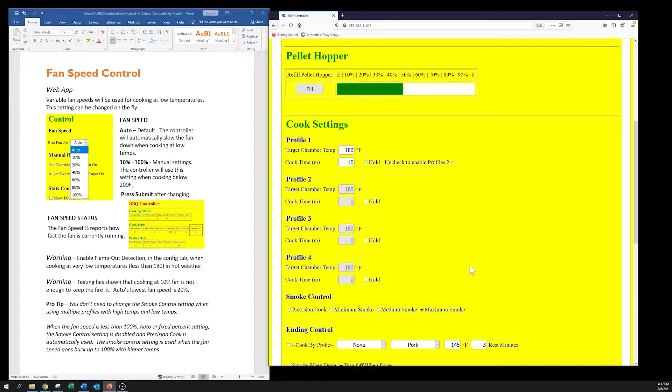I know a lot of people asked to have the fan speed settings next to each profile. I thought about that and looked at this, but this fan speed control requires quite a bit of changing behind the curtain, if you will. When you start slowing this fan speed down, a few things need to happen, and we'll go over the config tab - I'll show you real quick.

When you slow the fan speed down, one thing - your fuel on minimum needs to change. Now you're not going to see it change on the config tab; this is all done behind the curtain. What else changes? It also changes how PATC runs.

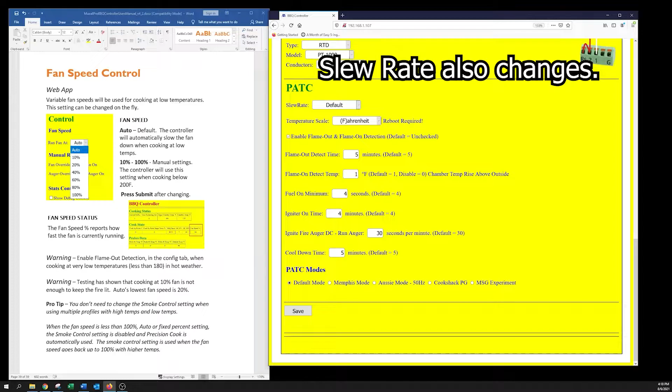Right now it's in the default mode, which most people are in. When you're running with a low fan speed, PATC's actually running more like Aussie mode. To help the user not have to figure out what all the settings need to be to run these different modes, I came up with the auto mode.

In auto mode, basically, if you're running a profile and say profile 1 is at 350, profile 2 is at 180, and profile 3 is at 300 or what have you - when you're running at 350, you're going to want like 100%. The fan will run at 100% because you need as much air as possible to generate the heat. But when we drop down to 180, not so much, right?

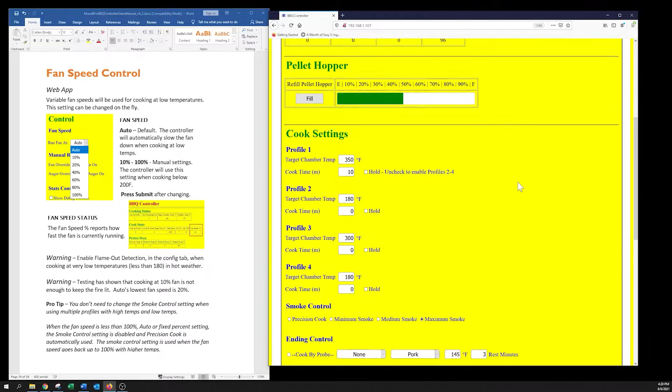So in auto mode - or any mode actually, auto or manual - when the chamber temp gets closer to 180 degrees, it's going to start reducing the fan speed. If you have it set on manual override like it is now, it will just set it at 40% and forget it. If you have it on auto, it will start adjusting down - it'll drop from 80 to 60, as the grill starts cooling off, and depending on how low the cooking temperature is, it will adjust the fan speed accordingly. It won't go below 20% in automatic mode.

The only way to get it below 20% is to use the 10% manual setting. I actually have a warning about using the 10% manual setting in the manual, because my testing showed 10% fan isn't enough to keep the fire lit.

Okay, so let's see where we are. I changed a bunch of stuff - let me refresh this real quick. I just didn't want to change all this; I'm a bit lazy sometimes. Okay, so it's running at fixed 40%.

Let's see, I don't think we should still have our graph. Ah, very good, all right, and we're getting it. It was funny, it was running along pretty good, then all of a sudden we started getting some swinging, and I think it's kind of windy outside.

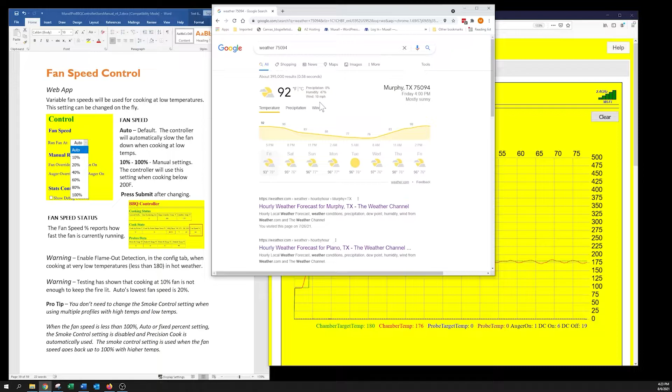It says 10 miles per hour, so it's a bit windy out there. I think that's what's causing these swings right here, is the wind. The barbecue isn't that hot to begin with, and when you start blowing air on it, it really cools it off and causes some of these swings.

One thing I want to let you guys know is behind the curtain, when you set this to 40%, I'm changing some other stuff. This isn't just a straight 40% run fan, because PATC will go crazy if it's on its default settings and you set this fan speed to 40%. So behind the scenes, there's other things going on. That's why it took me so long to get this feature out.

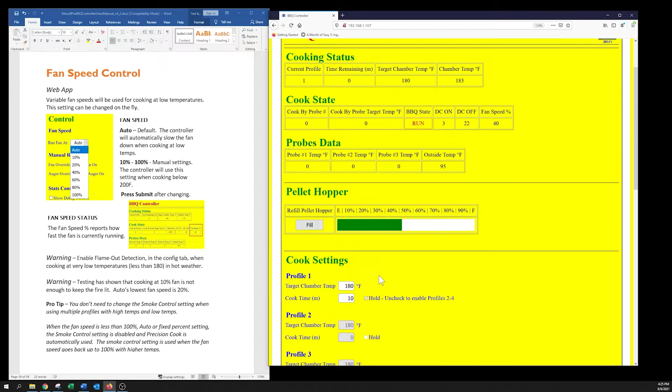Changing the fan speed, I did that in one day, but getting all the PATC stuff to work properly, especially with the different modes right here, these PATC modes, I had to make sure they behave and work properly. When you're using this thing, whether in manual or automatic, you don't need to change any of these PATC settings. I do it for you behind the curtain.

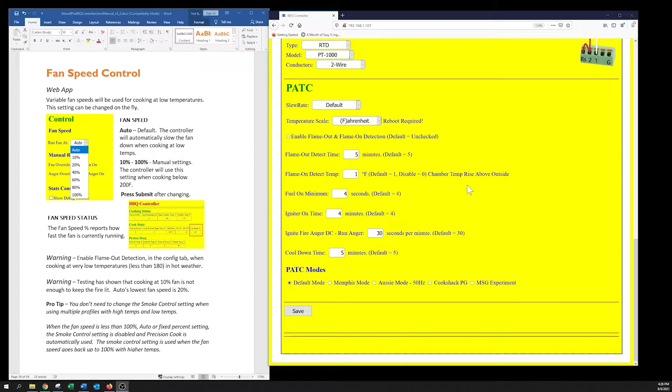If you want to run the 100% fan, let's say the variable speed's just not working for you, you can come here, click 100%, enter, save, and kick the fan speed up to 100%. Let's see, what else is there? Okay, so back to the manual.

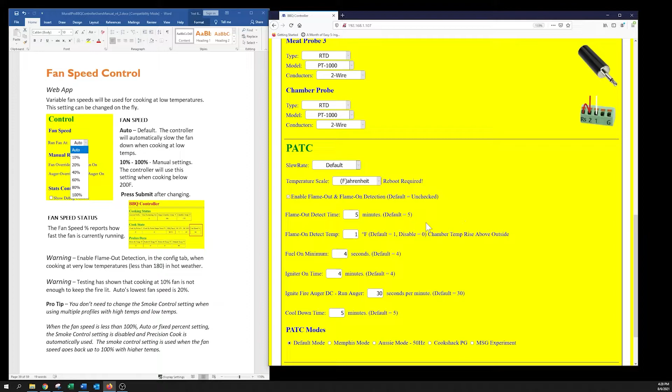One of the things I also mentioned is to enable flame out detection. I've been using flame out detection throughout this whole testing. With my two grills, I didn't have any problems with flame out after I got PATC happy. But I would still suggest, if it's 95 degrees outside and you're cooking at 180 or below, definitely use flame out detection, because it's not dumping a whole lot of fuel in there to keep that thing lit, even with the slow fan.

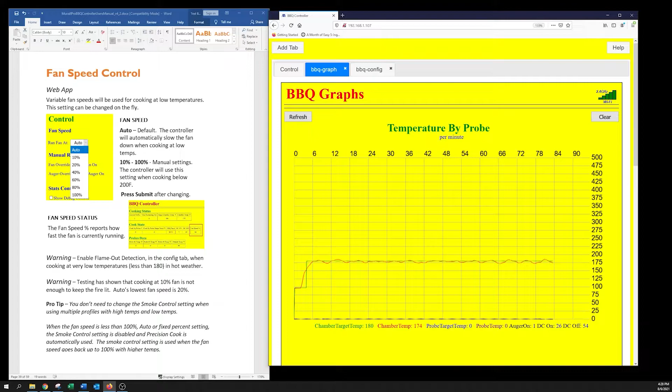So anyway, look at this, we're having a bit of a... wow, look at that duty cycle. Oh, it's in maximum smoke, that's why the duty cycle is so high. Oh, that brings up another thing, I think it's in here somewhere.

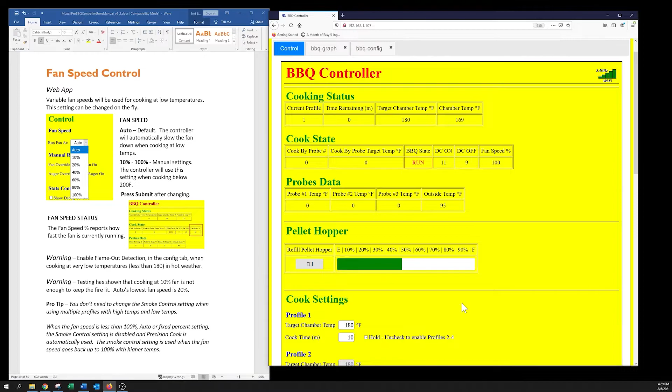I'm reading this right here, by the way. It says you don't need to change the smoke control setting, this guy right here, when using multiple profiles with high and low temps. When the fan speed is less than 100%, auto or fixed percent setting, the smoke control setting is disabled, and precision cook is automatically used. The smoke control setting is used when the fan speed goes back up to 100% with higher temps.

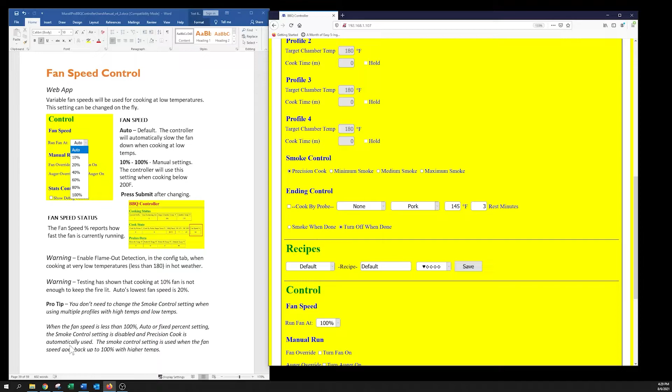When the fan is set at 100%, it's going to run the smoke control to whatever you have it set at. So if you have it set at maximum smoke and it's at 180, as long as there's a 100% fan, it's going to use the smoke control setting, whatever you have set. It's only when the fan speed drops below 100% that the smoke control setting gets ignored and it uses precision cook instead.

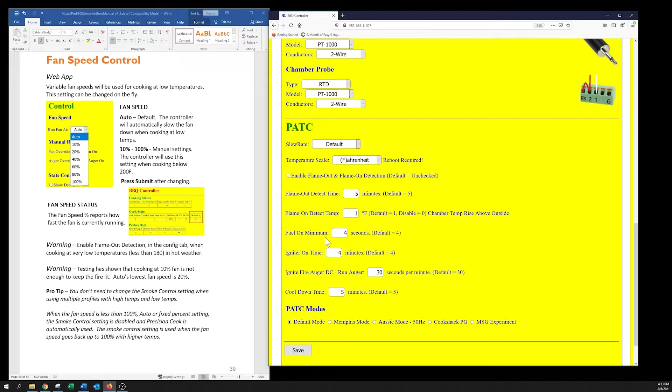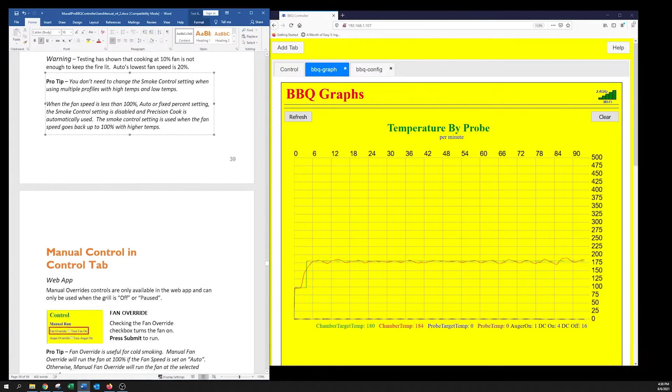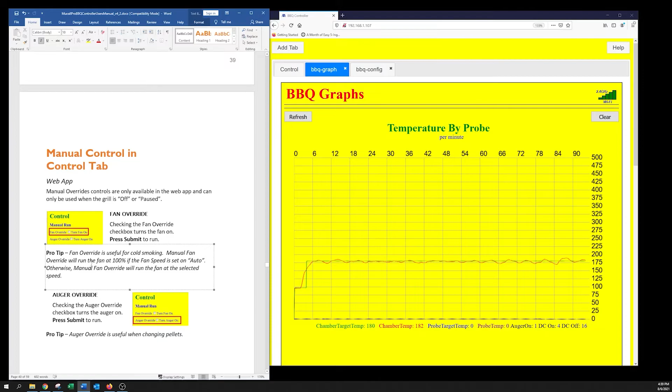Yeah, I did remember something else I wanted to mention, and that's actually in the manual control. I made a note in the manual somewhere. Manual fan override will run the fan at 100% if the fan speed is set on auto. Otherwise the manual fan override will run the fan at the selected speed.

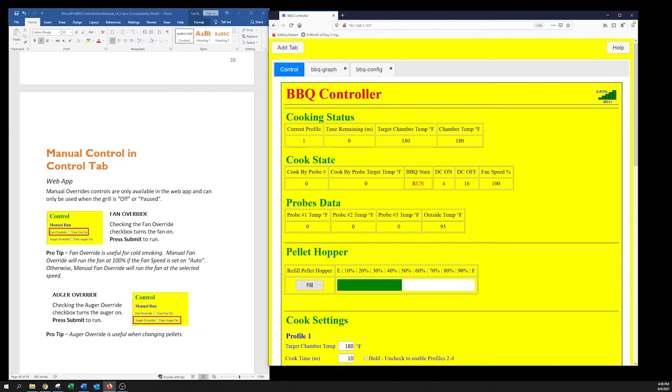So what I'm talking about is, to run the manual fan override, basically the fan runs all the time, you can't turn it off when it's cooking. But if the grill is off, not powered off, but the barbecue state is in the off state, and you turn on the fan override, if it's set on auto, this manual fan override will run the fan at 100%. If you have it set on 10 to 80% here, this manual fan override will run the fan at whatever you have it set at.

So if you have it set at 10, click this, hit submit, then you'll get 10% fan. You can use that for cold smoking or whatever, but this manual fan override only works when the grill is off. This works all the time, okay? I hope that makes sense.

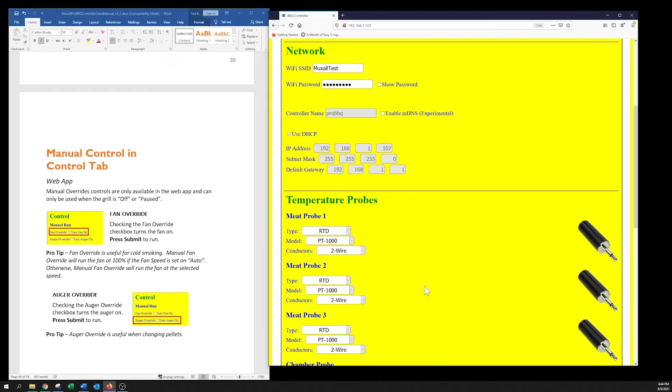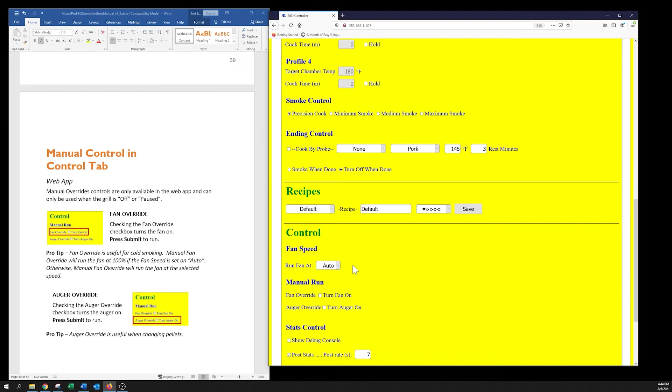After the update, you don't have to change anything in your config, that should all remain the same, and you don't have to do anything, right? It'll default to auto, right? That's another thing, make sure to test this before you put any meat on.